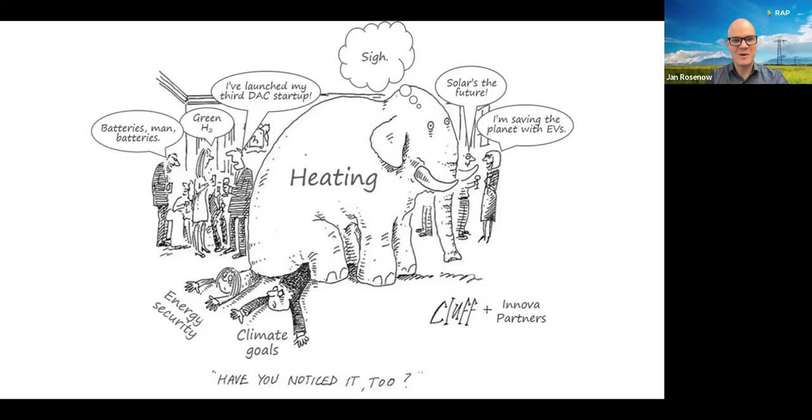I have three parts of my presentation, just to give you the heads up what's coming. Bit of context, then I want to talk about individual home heating, and then talk a bit about district heating. So these are the three parts before I wrap up. Let's start. Let's look at some of the context.

And I think what's quite important is to look at the current situation in Northern Ireland, which is not looking great when you look at the heating fuels currently being used. From a climate perspective, most of it is fossil fuels, a lot of oil, and quite a bit of gas as well, but highly carbon intensive. That's the main takeaway here.

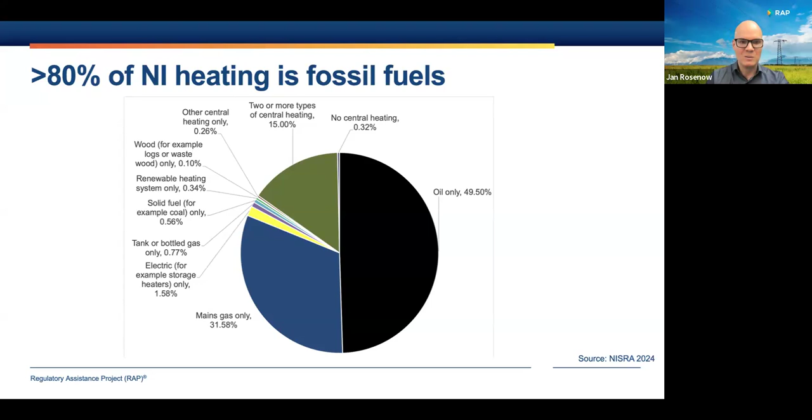And when you look at the share of renewable heating systems, that's 0.34% on this chart here, based on the latest statistics. And yes, there's some electricity in here too, but that's also not very much at all. So overall, a heavily fossil fuel dominated system.

On the other hand, when we look at the share of renewables in the power sector in Northern Ireland, it's now approaching 50%, and in fact, in some months, is already exceeding that. So we're actually seeing some pretty impressive progress when it comes to renewables in electricity in Northern Ireland. And this is mainly wind, of course. This is not so dissimilar to what we see in other countries around Europe.

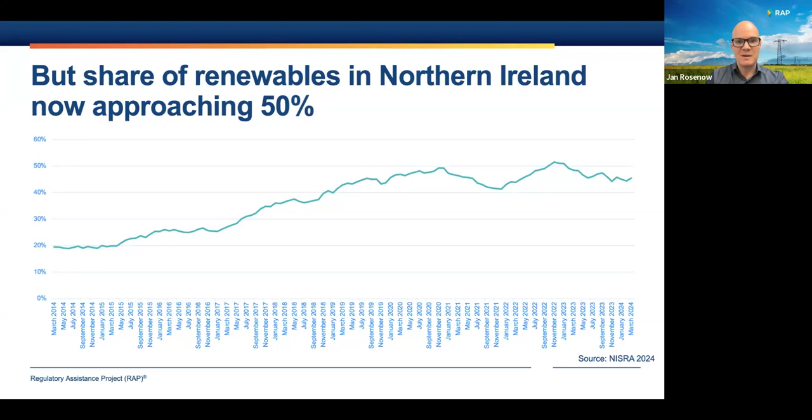Here's a graph which I shared the other day on social media. I was quite surprised by how far we have come. And you see the green line is the production from renewables, solar, wind, and hydro across the European Union. And then you have on top the fossil generation as a percentage of total generation. And you see now for the first time last year, actually renewables have outperformed fossil fuels.

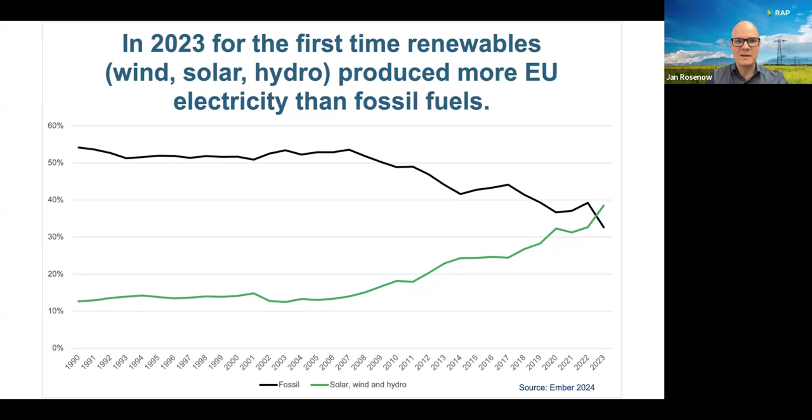And this does not include biomass, which is often mentioned by skeptics of the transition as the kind of main driver of renewables. It really isn't. When you look at electricity, it's now solar and wind in particular that are driving the transition away from fossil fuels. So overall, good news on electricity.

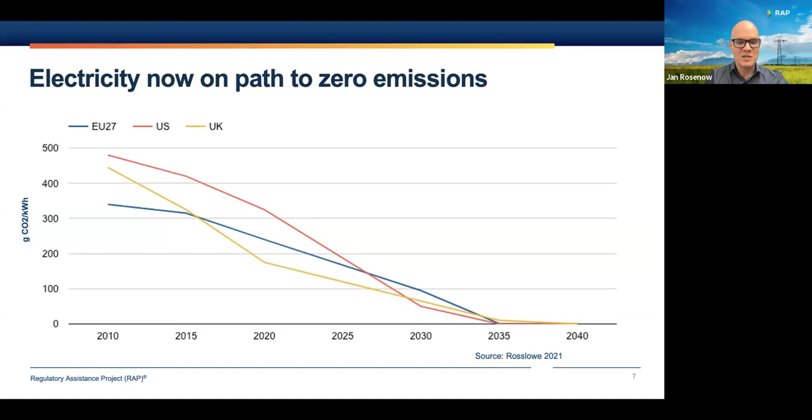Going forward, we're going to see more of that as predicted by analysts, and government targets have been set in the UK, the US, in the EU, to completely decarbonize the power sector at some point in the 2030s. It could be in the late 2030s or the mid 2030s. If we have an election coming in a few weeks' time, and the outcome will be that we have a Labour government, they want to do that by 2030 already. The overall message here is we are on a trajectory towards low emissions, perhaps zero emissions in electricity.

The other good news is that there is an awful lot of heat around us that is currently unused. We have ambient heat in the rivers. We have ambient heat in the sea, in the ground, and in the air. And it's a resource that is abundant. There's so much heat around us, we can't use it all up for heating our buildings. There's just too much of it. The main challenge is, how do we harvest it? How do we actually make use of it?

And that's where, and I will talk about heat pumps in a minute, electrification of heating can play a key role, because you're essentially getting cleaner electricity and then using that to harvest that ambient heat, which is renewable and is free, essentially.

The main cost is the electricity and the technology. And this could reduce final energy demand dramatically. So we're currently wasting a lot of our energy because of the way we use it. And this is analysis by a colleague of mine at Oxford University, Professor Nick Eyre. He's calculating that by electrification, we could reduce final energy demand by about 40% globally. This won't be so dissimilar in Northern Ireland. Huge reduction potential and an increase in efficiency by doing this.

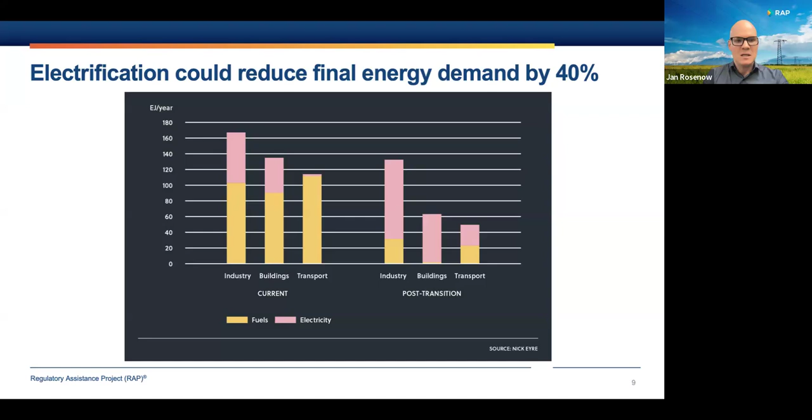Right, and now I want to move to individual heating and talk a bit more about heat pumps after sort of spelling out that electricity is getting cleaner and there's an abundance of ambient heat resources around us we can use. Of course, heating of individual buildings is complex, right? This is the city of Oxford where I live and where I'm speaking right now. Lots of individual buildings, different building types, old architecture, difficult to treat, very dense urban area. So heating is hard. It's harder than telling some of the power producers to switch to renewables, as we have done in the past. We're dealing with millions of people and millions of decision makers here.

So fabric efficiency is still important, no doubt, to bring down the emissions from heating and the heat demand and the running costs. And we have calculated, this is now a bit dated, 6 years ago, that for the United Kingdom as a whole, the potential for fabric insulation is still very, very large. And overall, energy efficiency could reduce energy demand equivalent to 6 Hinkley Point C power stations. Of course, most of the heating isn't electric, so the comparison isn't quite accurate, you might say, but it gives you a sense of scale, just how big the opportunity for further efficiency still is, even after many years of trying to insulate buildings and make them more efficient.

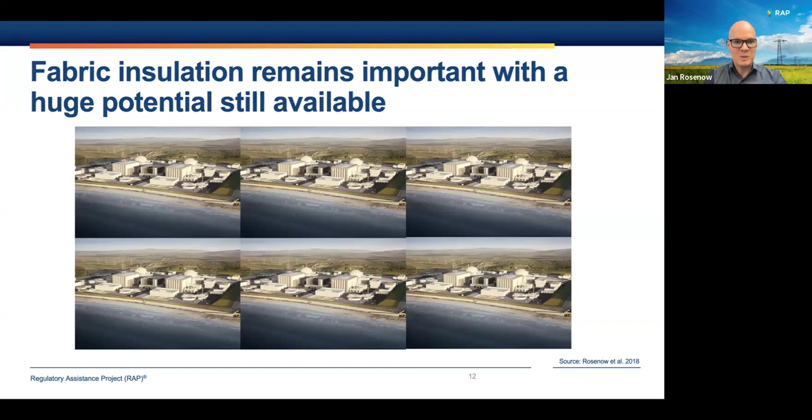That's only one part of the equation. The other part is heat supply. And heat pumps, not just in my view, but pretty much in the view of most analysts around the world now, are seen as the critical technology for decarbonization of heating. And that includes both individual heating systems and district heating. I'll come back to that in a few minutes' time.

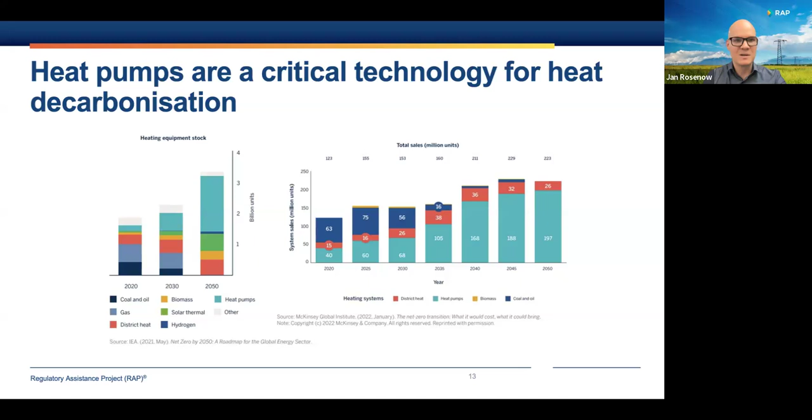On the left-hand side, you see the stock of heating equipment as projected by the International Energy Agency for 2050. The turquoise or light blue piece here, that is heat pumps. So about 55%, they believe, will need to be heat pumps by 2050 in order to meet the net zero goals. On the right-hand side, you see a McKinsey study that looks at the equipment sales of heating systems, and most of the sales, about 90%, a bit less perhaps, in 2050, they believe should be heat pumps. So clearly, heat pumps are seen as important, not the only technology, there's many others, but they are the key technology, at least when you look at most of the studies that I have seen.

And why is that? Well, simple reason. A gas boiler, or an oil boiler, which is common in Northern Ireland, you always have losses along the way. You're essentially putting in more energy than you get out. That's what you see on the left-hand side here, because you have leakage already at the well stage, transmission losses, and then losses in the boiler itself. A heat pump is kind of the mirror image. You're actually getting more out of the system than you put in. Which seems very awkward, but that's exactly how heat pumps work, because remember that ambient heat, that big resource we have, is already there. So we're just using the heat pump to move existing heat, compress it, bring it up to a higher temperature, and that makes heat pumps so efficient. And that's why they show up in most of the modeling as a key technology.

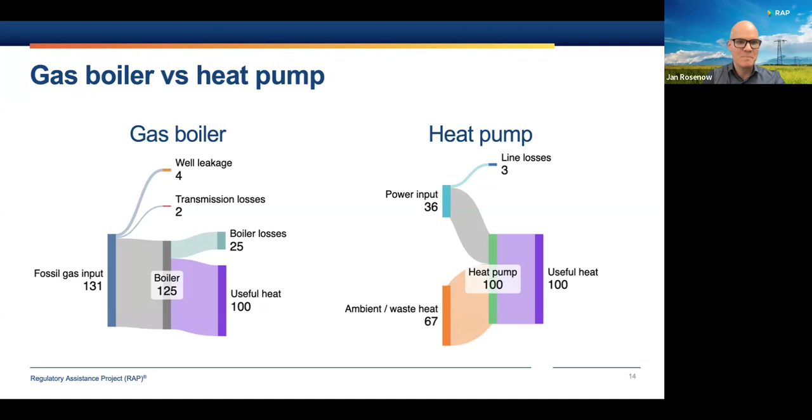We have already installed 200 million of them around the world, which is pretty good, but we're not going fast enough. There's a big gap still between what the International Energy Agency believe is needed and where we're currently headed.

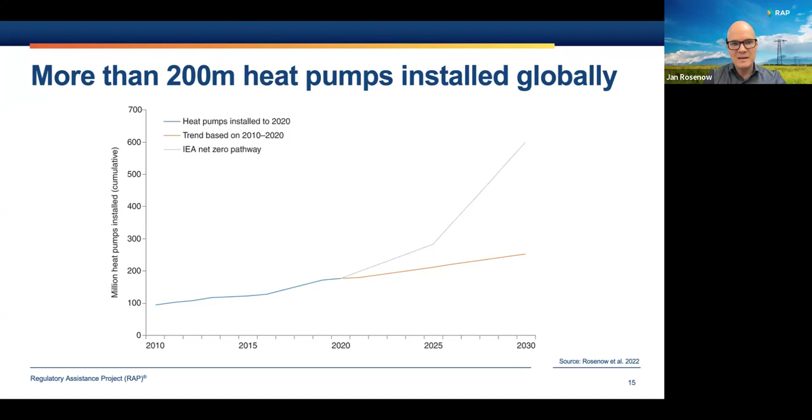We've written a paper a couple of years back, sort of looking at the global heat pump market, and this is what we found. The other important finding from that work is that actually most heat pumps that are being installed currently are in the coldest climates. And this is a rather busy graph, and I'm just going to walk you through it quickly.

So on the x-axis, you see the number of heat pumps per 100 households. In other words, the penetration of heat pumps. So the further to the right you are, the more heat pumps you have. In other words, let's say where Norway is, that's about 60. So about 60 heat pumps are currently installed in Norway for each 100 households. It's now a bit more because this data is a bit old now. It's from 2020 or 2021, I think.

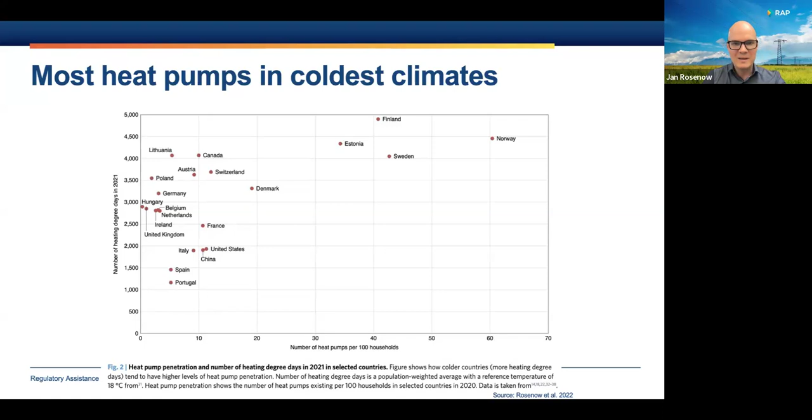And then the higher up you are on the chart, the colder it gets. This is measured in the number of heating degree days. And what you find is the coldest places also have the most heat pumps, which is surprising given that people often say heat pumps don't work in cold climates, but clearly they do. Otherwise, people wouldn't install them in Finland and Norway, Sweden and Estonia in such large numbers.

And indeed, when we zoom in on those places, you see on the left-hand side the deployment over the last 20 years. Rapid increase in deployment of heat pumps of different types. Initially mainly ground source, then increasingly air-to-air, and a little bit of air-to-water and exhaust heat pumps as well.

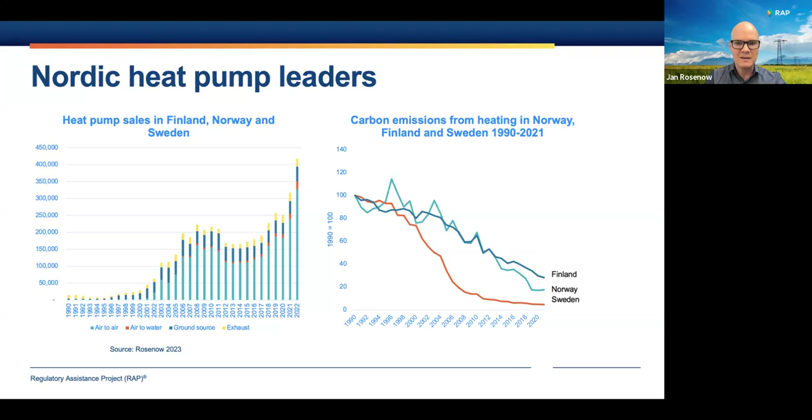And on the right-hand side, you see the impact on carbon emissions. Not just heat pumps, that's also fabric efficiency and district heating, but heat pumps played a very significant role here in that downward trajectory of carbon emissions from residential heating.

And I've written a fact check with 18 misleading myths about heat pumps for Carbon Brief. It's thousands of words long. If you really want to look at the detail, there's lots of sources there that debunk most of these myths. I hope it's a useful resource for those of you who are interested in that sort of thing.

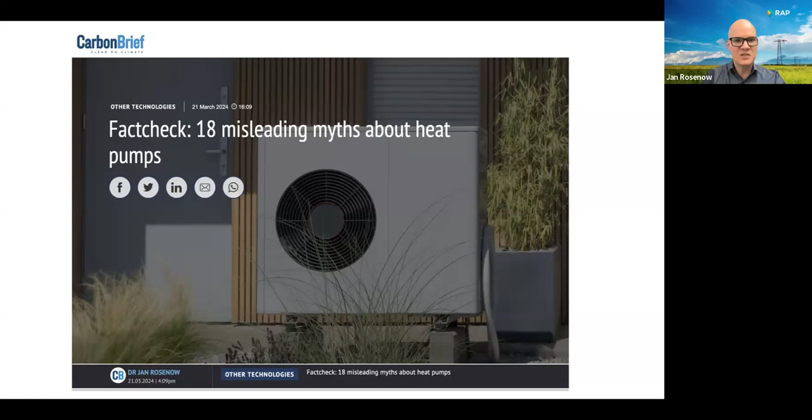How do we scale heat pumps further? And what could Northern Ireland potentially do as well? This is one of the questions that we've asked ourselves. And we produced a policy toolkit that we launched in Egypt at Sharm el-Sheikh at the climate conference. And we essentially have three main pillars. One is to make sure we get the pricing right.

Too often, the main reason why people buy fossil fuel heating systems is that they are just cheaper to run. Because we don't put a carbon tax on fossil fuels. And we also put a lot of the policy costs, the costs for scaling renewables, etc., or energy efficiency on electricity. So that imbalance needs to be sorted out. And unless we do that, it's going to be very hard to persuade people to buy a technology that's more expensive to run and to keep warm.

Some upfront funding, grants, rebates, loans will still be needed because of the high upfront cost, and regulation. We're now seeing increasingly new buildings no longer allowing fossil fuel systems, but also the replacement of existing heating systems increasingly around Europe. And now also in the US, we're seeing that regulation is being deployed to make sure we move to clean heating.

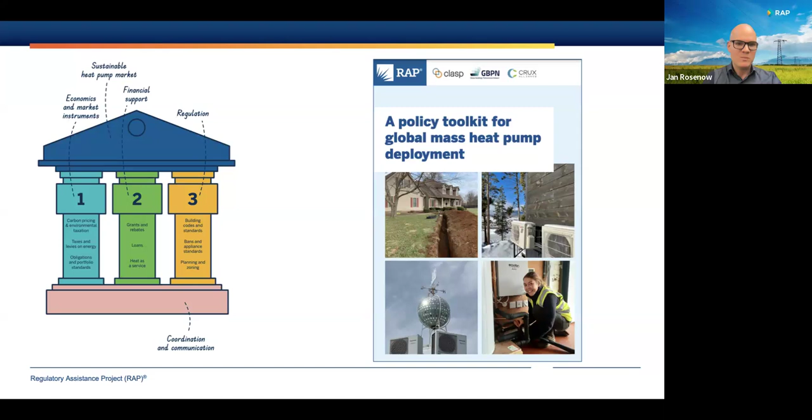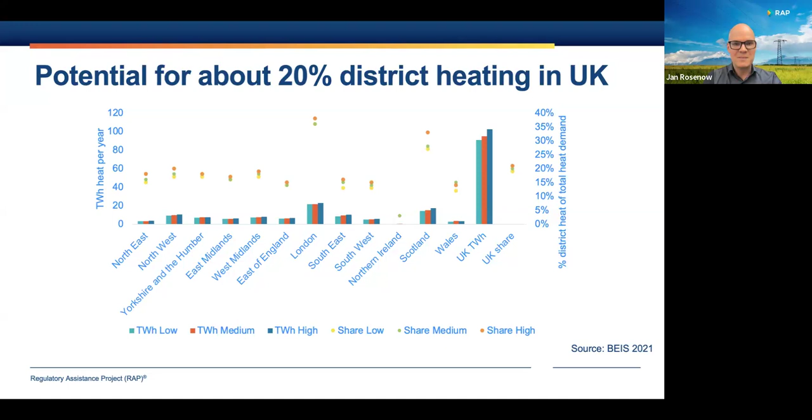And that would be using a whole range of sources. Could be waste heat from the sewers, from the underground in London. It could be from the air, from the ground, seawater. There's actually a huge seawater heat pump in Esbjerg in Denmark, the largest one in the world, 60 megawatts. I don't have a picture of that here, but huge potential for district heating.

Just very quickly, some countries have already reached very high shares. Denmark, Sweden, 50% plus of district heating for buildings. And much of that is also renewable, although it's still a lot of biomass in those places, to be fair. The UK doesn't show up on this graph. It's only the EU 27. It would sit in the very bottom left corner, close to maybe Spain, Belgium, Greece.

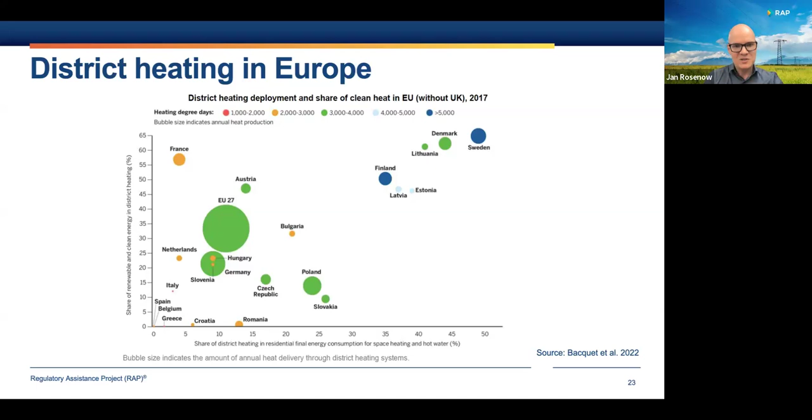And that is simply because the share of renewable energy in district heating, which is here depicted on the y-axis, and the share of district heating overall of total consumption for heating is very low. And here you see it. So currently only about 2% of heating in the UK comes from district heating.

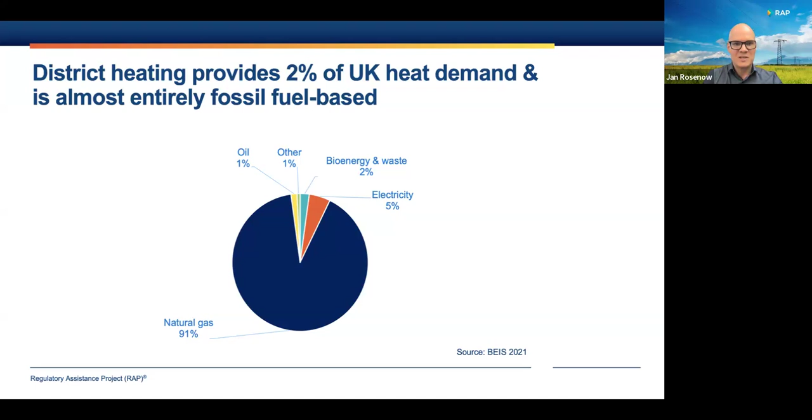And most of that is fossil fuels, very, very little renewables in here, a bit of electricity, a bit of bioenergy, but it's largely natural gas, fossil gas, again, based on the most recent figures I could find from the UK government. So we have a long way to go if we want to scale district heating and also clean it up, but the potential is very, very large indeed.

And here's one of those big heat pumps that I mentioned before. This is not in Esbjerg. This is one I visited in Copenhagen, and it's connected to the district heating system there. And it's using seawater as the main heat source. This is only 6 megawatts. So imagine what the 60 megawatts unit would look like. That's 10 times larger in terms of capacity.

These are real monsters. They're huge machines, very impressive indeed. If you ever get a chance to see them, I highly recommend it. It's quite an impressive achievement of engineering.

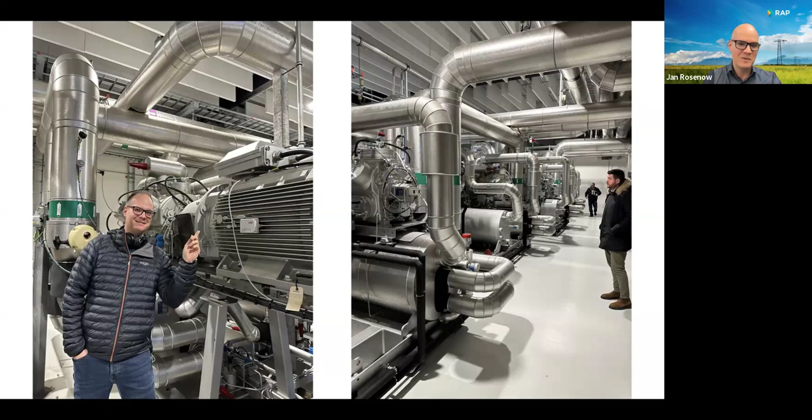Right, so just 2 or 3 words on hydrogen. I just have to throw this in there and then I wrap up. So often the question that comes up is why do we have to do all these complex things, electrification, fabric efficiency, heat pumps, district heating? Can't we just have hydrogen in the pipes? Well, the answer is you could potentially, but the evidence suggests it's not a good idea.

I've reviewed now 59 studies. The last meta review I published was in December when it was 54 studies. It's now 59. None of them suggests a major role for hydrogen in heating. Yes, in some niches, waste heat from electrolyzers and district heating, potentially, that makes sense. Maybe in very cold climates, near an industrial cluster, but not at scale, not to replace the gas in the pipes.

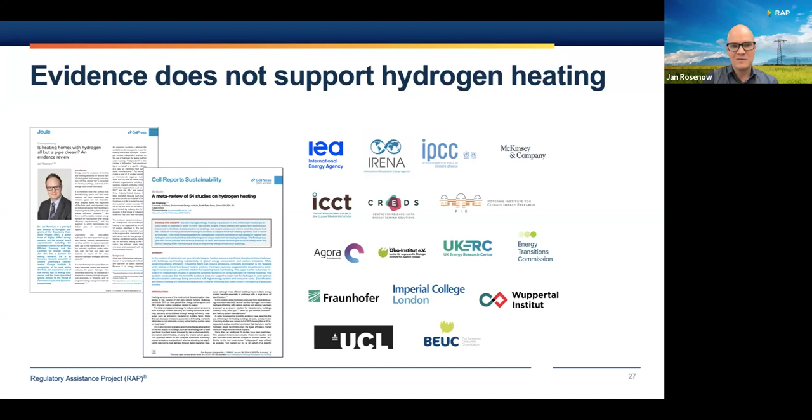You can see here some of the institutions that have commissioned research on this, produced research on this, and it's pretty unanimous. The main reason is higher cost, about 2 to 3 times higher consumer costs, and efficiency is quite poor. Let me wrap up.

It's a long, steep road ahead, and we don't quite know exactly where it takes us. More innovation will happen along the way, but to the mountain pass we will have to get eventually, and I think we will. I'm an optimist. I think this can be done, and there's great opportunity for innovation for a cleaner, more sustainable future in the heating sector.